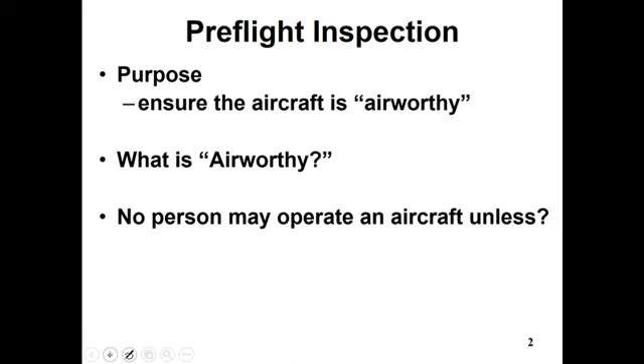So no person can operate an aircraft unless it's airworthy. And then, of course, here's one of the FAA's catch-all regulations: the pilot in command, the PIC, is responsible for determining if the aircraft is in condition for safe flight. So effectively, that means it is the responsibility of the PIC to do a pre-flight inspection and make sure that it is safe for flight.

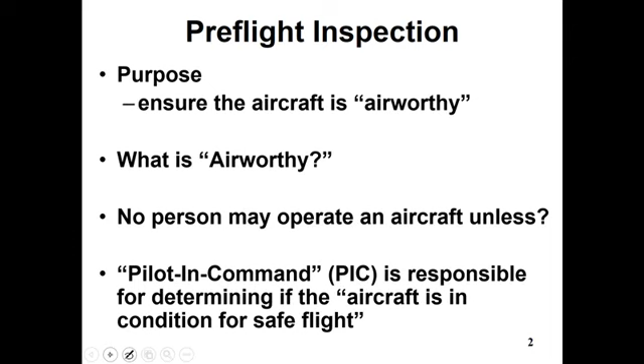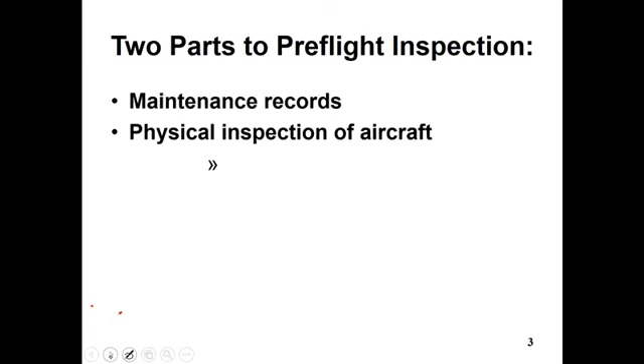So there's two parts to this pre-flight inspection. One is maintenance records, making sure that all the right maintenance has been done. And number two, visually taking a look and inspecting the aircraft before you get in it and go flying.

So the first thing we're going to do is go over what type of maintenance records you might have to pay attention to before you go flying.

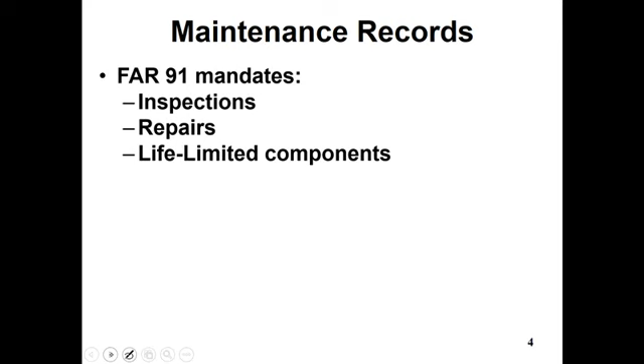Federal Aviation Regulation Part 91 mandates that certain inspections get done. If things are broken, you have to do repairs. FAR Part 91 also talks about life-limited components—we're going to get into that. Those are parts that, when they hit their life limit, you have to replace them.

We're also going to talk about airworthiness directives. Airworthiness directives are kind of like a car recall, where something's wrong with lots of different aircraft and everybody's got to get it fixed.

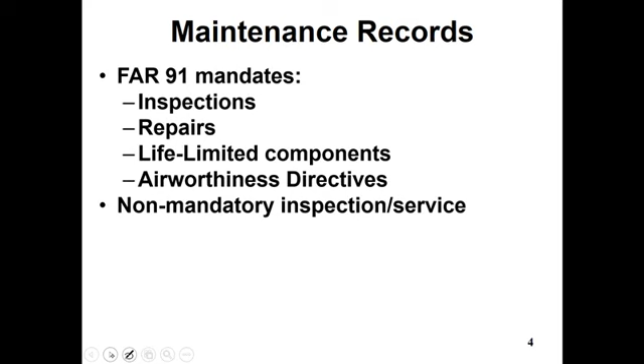There's also non-mandatory inspections and servicing of the aircraft that usually get done, but in some cases it's not mandatory, and it'll be a good idea to know which ones are mandatory and which ones are not.

And then anytime work gets done on an aircraft—any kind of maintenance at all, whether it's a pilot doing the work, a mechanic doing the work, or a repair station doing the work—FAR Part 43 says you have to record the maintenance that was done in the maintenance records. We commonly use the word maintenance logbook to refer to the records where everything is written down that gets done to the airplane.

Okay, first we're going to look at inspections. There are a lot of different inspections, and how often they have to get done, or how long they're valid, varies quite a bit. First of all, the annual inspection is valid for 12 calendar months—that's why it's called an annual inspection—and it has to be done by a mechanic who holds an airframe and powerplant rating, and they have to have an inspection authorization.

Inspection authorization: effectively you have to be a mechanic, and you don't have to write this down, but you've got to be a mechanic for 3 years, you've got to be active during the last 24 calendar months, and you've got to take some gnarly written tests to prove that you are a super awesome mechanic.

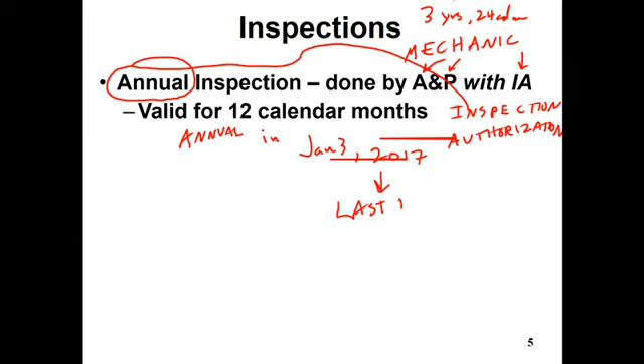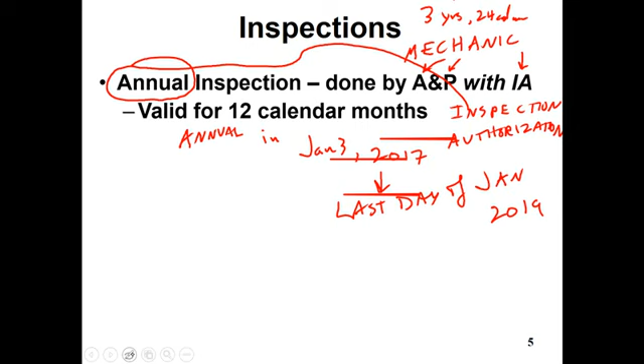12 calendar months effectively means that, say for instance, if you do an annual in January 3rd of 2017, it's good until the last day of January, 24 months later, which would be 2019. It's just like the calendar days—or calendar months—that we've talked about before.

Alright, so if I can just get this working the way I want, which seems to be very difficult for me today.

All small aircraft—when I say the word 'any,' I'm really talking about small aircraft. For small airplanes, helicopters, blimps, and gliders, the annual inspection system is just one of several ways you can keep the aircraft airworthy using inspections. That's the one we're going to talk about the most.

In a later chapter, we're going to talk about some other ways to maintain an airplane. But by far, the vast majority of small airplanes are in the annual inspection system.

Now, there are some times, in addition to the annual inspection, when an inspection has to be done every 100 hours. For instance, we'll get to that here in a second if I can get my pen going.

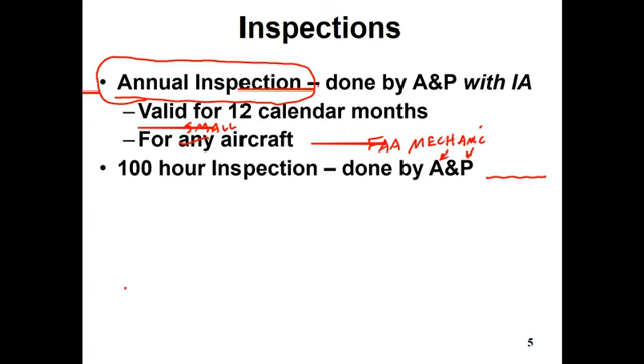A 100-hour inspection also has to be done by a mechanic, and this has to be an FAA certified mechanic, just like you're going to be an FAA certified pilot, who has an airframe and powerplant rating. But you'll notice they don't have to have the inspection authorization, so they can do this right out of school. As soon as they get out of school, they can do a 100-hour inspection.

What's rather interesting is that an annual inspection and a 100-hour inspection are the same inspection, considering what gets done to the aircraft, how it gets inspected, what gets inspected, how well it has to be inspected. It's all the same. What's different between the two is who gets to do it and...

When you need to do it. Why is that thing moving? And there we go.

The 100-hour inspection, done by a mechanic with an A&P rating, is valid for 100 hours of flying time, and then you have to get another one done. So that means it's going to end up getting done more often.

Let's say, for instance, you fly out of airport A and you're going to go to airport B, and the aircraft is usually stationed or based at airport A. You fly to airport B, and then you look at the maintenance records, and let's just say this is a 2.0 hour flight, and you're at point B, and you want to get back to airport A, where you're going to get your 100-hour done, and you realize that you're at 99.0 hours. If you make this 2-hour flight, you'll end up over here at 101 hours.

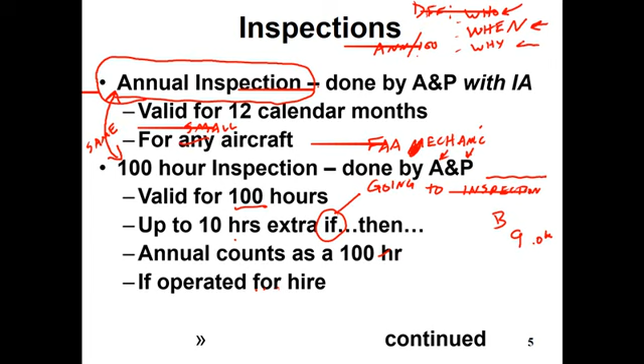Everybody has to have an annual inspection done, but you only have to have the 100-hour inspection done if the aircraft is operated for hire. So for instance, let's say you happen to own a PA-38 all by yourself, and you fly it around at the Fresno airport, and you had your annual inspection done in January of 2017. You can fly it around for 500 hours or however many hours you want, and you only have to come back and get the annual inspection done by the end of January of the next year, as long as it's not operated for hire. That is, you can't give rides in it for pay. You can share your expenses like being a private pilot. But if the aircraft is operated for hire, you have to have the 100-hour inspection done.

Now there is an interesting thing, for instance, like parachute jumping. The airplane is being operated for hire. People are paying money to get in it. You'd have to do an annual inspection on it, and then you'd have to do 100-hour inspections on it.

There is an interesting spot where you're doing flight instruction for hire. If the company that is renting you the airplane is also the company that you're paying for the flight instructor, then it's considered flight instruction for hire. If you own your own airplane, or somebody loans you an airplane, or you rent an airplane at a place to rent airplanes, but then you get your flight instructor separately, then that's not considered for hire, and you don't have to have a 100-hour inspection on it.

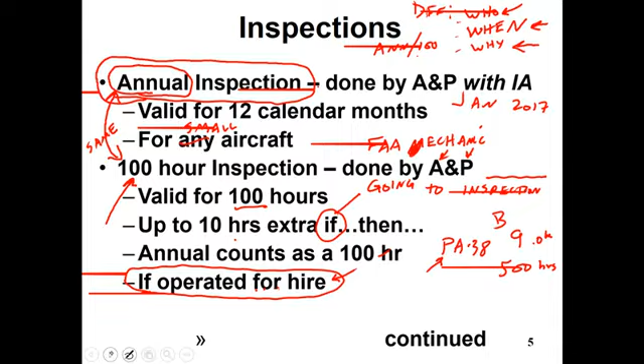The automatic altitude reporting system, another name for that, is the transponder mode C.

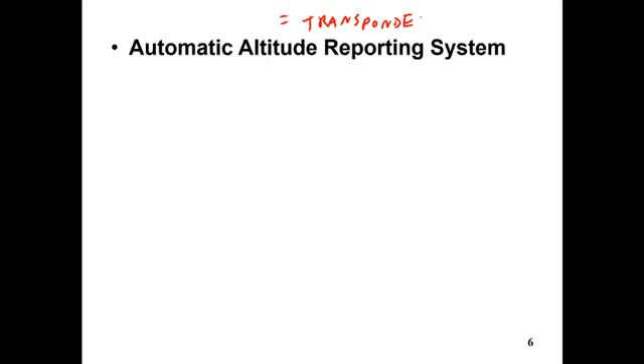The Mode C transponder, that's the part that transmits the pressure altitude inside of your static system. That has to be inspected, and that inspection is valid for 24 calendar months. I'm not going to go through the calendar month deal again.

But if it's not inspected within the last 24 calendar months, the inspection is not valid. Now you can't use it. You can't turn the transponder on to transmit Mode C, which means all the places you want to go flying that mandate Mode C, you can't go there.

So Class C airspace at Fresno Air Terminal, you got to have Mode C. So if you go out to fly an airplane out of the Fresno Yosemite Airport and the Mode C inspection, or the automatic altitude reporting system inspection, expired, you can't go.

There's also an altimeter and static system check, where it checks the accuracy of your altimeter, and checks the system of pipes or lines that go to the altimeter to make sure it gets the outside air to measure your altitude. That inspection also lasts for 24 calendar months.

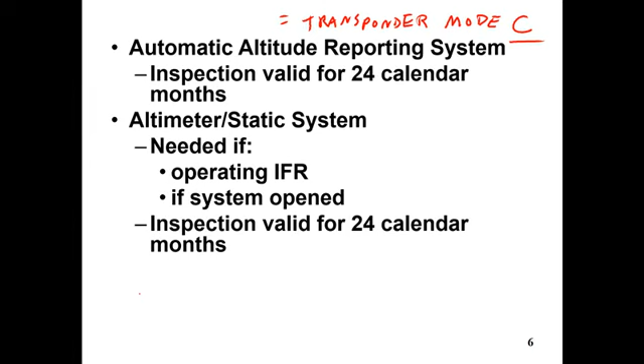You need it only if you're doing certain things. For instance, if you're flying IFR, Instrument Flight Rules, and of course we are going to be flying Visual Flight Rules with a private pilot certificate. Visual Flight Rules pretty much means good weather and away from clouds. So if we're just going to fly VFR, we don't need the altimeter static system test done.

But if at some point we're going to get our instrument rating and fly IFR, this is going to be a big project. We're going to have this done.

And if somebody does maintenance on the static system, then they have to do an altimeter static system check. But you're probably not going to know if they did maintenance on the aircraft, because there's no requirement for you to figure that out. And again, the altimeter static system inspection is good for 24 calendar months.

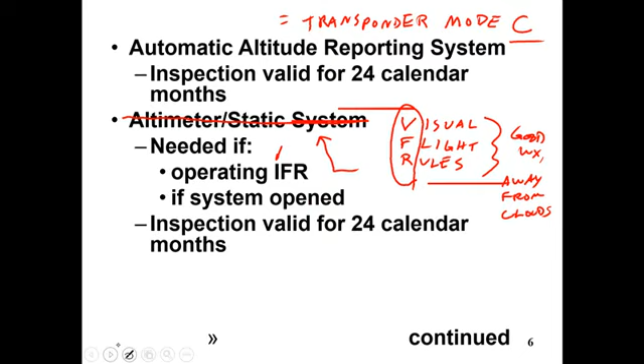The ELT is usually a little orange box in the back of the aircraft. You can't see it; it's usually behind the bulkhead. It's designed so that if you have a really hard landing, or you land off field and decelerate fast, the ELT has a motion sensor in it and it will start transmitting on some emergency frequencies, and someone will probably start coming to look for you.

That ELT has to be inspected, and its inspection is good for 12 calendar months. So when you're looking through the logbooks to see if all the inspections are done, you're going to be looking for the ELT, or emergency locator transmitter, inspection and see if it was done in the last 12 calendar months.

Also, ELTs have batteries, and although it's not really an inspection, it's a life limit. Batteries — it's in FAR Part 91, where it talks about having to replace the batteries if you've used the transmitter, all added together, up to 1 hour. So if for some reason it was getting tested, or it went off by accident, and it transmitted cumulatively — all added together equals 1 hour — then you got to replace the batteries.

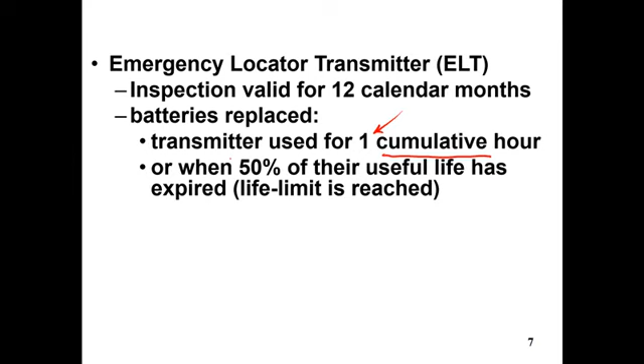Or you also have to replace the batteries whenever 50% of their useful life has expired, and that's the life limit of the battery. When you hit a life limit, you got to throw the part away or recycle it. You can't fix it, and that date of the life limit is going to be written in the logbook. So it'll say something like: ELT battery due replacement, January 31st, 2020.

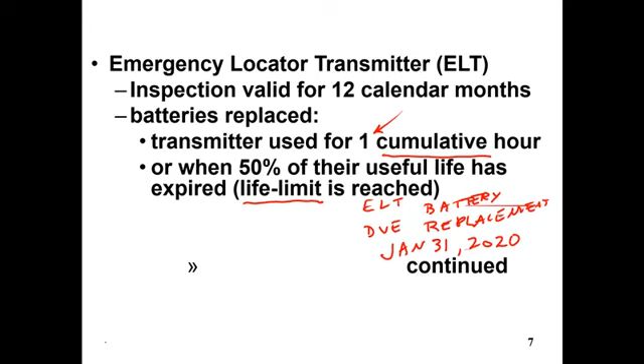Hey, talking about life-limited parts, let's talk some more about life-limited parts. Life-limited parts means that when a part reaches its life limit, you have to throw it away. It has to be discarded. You can melt it, recycle it, throw it in the trash, but you cannot inspect it and put it back on the aircraft. You cannot repair it and put it on the aircraft. There is nothing you can do to that part that makes it airworthy again. It's no longer airworthy when it hits its life limit.

A part that you use on condition means that it never has a specific moment when, aha, it looks good, but I have to throw it away anyway. That's really what life limit is. You're actually going to take the part off the aircraft while it's still working and still looks good, but you're not going to use it anymore, because at some point it might break, so you're going to replace it before it can break.

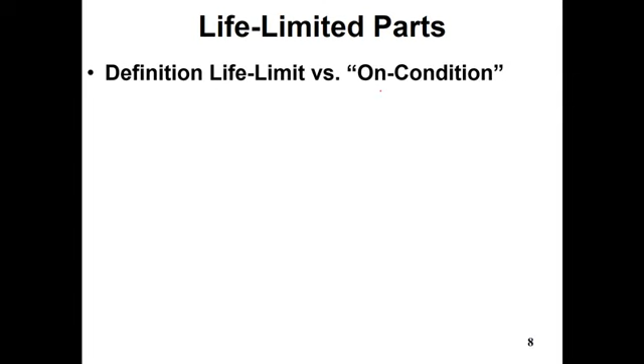On condition parts means that it's never expected to break and that you never have to replace it just because of so many flying hours. It just has to get inspected during the annual inspection or the 100-hour inspection.

So let's take a look at some PA-38 Piper Tomahawk life-limited parts. Of course, Tomahawks have ELT batteries. Usually those batteries, when installed, have a life limit of about 2 years, but it varies based on what battery.

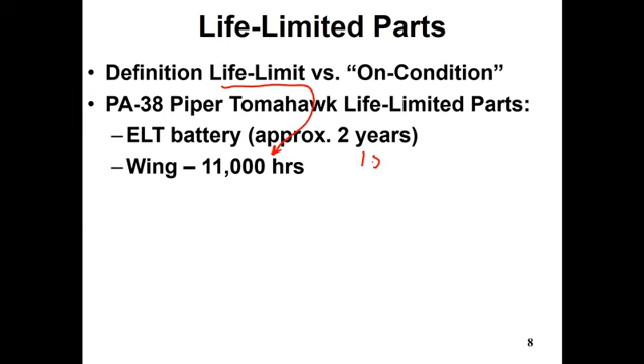The wing on a Tomahawk is designed so that at 11,000 hours, you have to take the wing off and put on a new wing. What that effectively means is the life limit here is 11,000 hours. That probably means it could go to 15,000 hours before it breaks, so subtract 11,000 hours, you've got 4,000 hours of a safety margin there. That's usually the way life-limited parts work, you replace parts before they go bad.

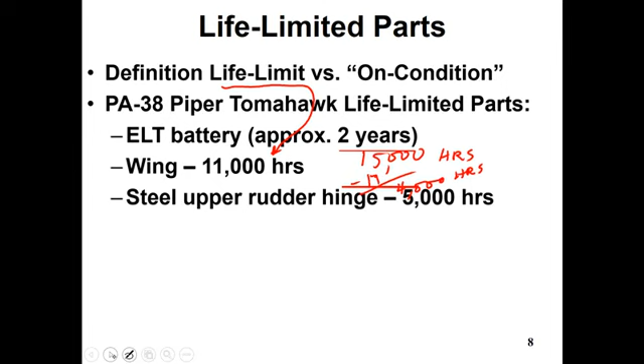There's a steel upper rudder hinge that has to be replaced every 5,000 hours. There's a lower longitudinal trim spring, or trim springs, that have to be replaced every 1,500 hours. The fin spar attachment plate, depending on which ones you've got, have to be replaced anywhere from 3,000 to 5,000 hours. These are probably, at least all the ones I could find, of the life-limited components in a Piper Tomahawk.

This ELT battery is going to be on pretty much every airplane out there. There's a lot of small airplanes that don't have these kinds of parts, so the only life-limited part on it might be an ELT. But when you start talking bigger airplanes, and certainly when you start talking helicopters, you end up with lots of life-limited parts installed on the aircraft.

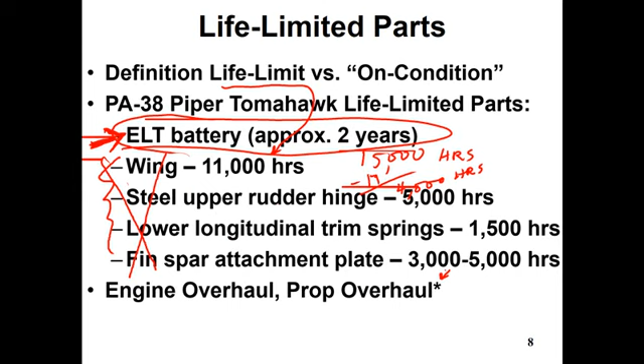Now I want to talk about engine overhaul and propeller overhaul. I put an asterisk to remind me that under a lot of conditions flying little airplanes, although the manufacturer may recommend overhauling the engine and the propeller, generally speaking the manufacturer's recommended time between overhaul is only required if the aircraft is operated as an air taxi under Part 135 or in scheduled airline service under Part 121. So we're going to be flying airplanes under Part 91, and even if the manufacturer recommends it, we don't have to do it.

Now a lot of people go ahead and do it because most of the time it's a good idea, but engine overhaul, prop overhaul, and a lot of other overhauls like a magneto overhaul are not required under Part 91, even though the manufacturer recommends it.

Same thing with an oil change and an oil filter change. Although it's a really good idea, your engine's going to be a lot happier and last a lot longer, you don't have to change the oil and the filter. If the engine has a filter on it, generally speaking the manufacturer recommends changing the oil every 50 hours. But I've got to draw a line in here - these are definitely not life-limited components, but they are things that tend to get done on a certain time basis.

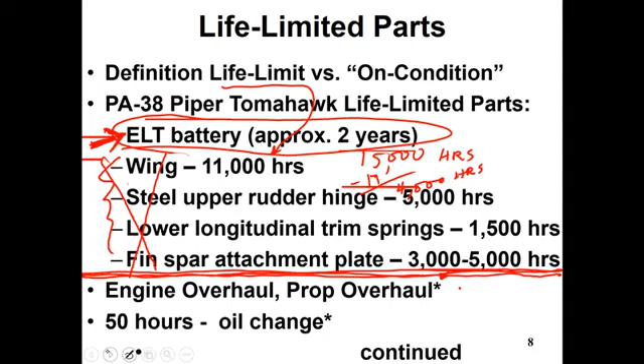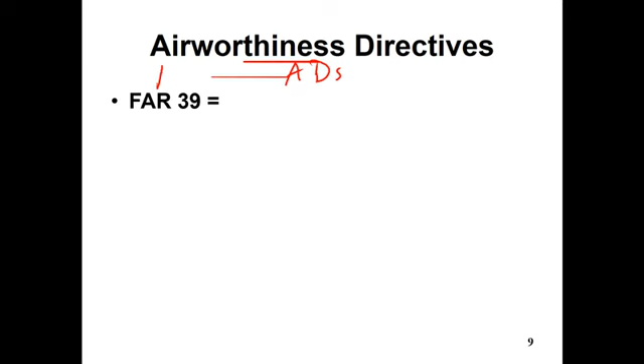Okay, last thing we're going to talk about before the visual inspection are airworthiness directives. Another term for airworthiness directives is ADs, very commonly abbreviated that way. ADs are covered in Federal Aviation Regulation Part 39, which is a federal law, which means they are mandatory.

Now, if you've ever heard of a recall on a car, that's where a car manufacturer figures out they made a car with a defect found in lots and lots of cars. So they try to notify all the owners to bring it into a dealership and maybe get it fixed for free. It's a good idea because it's usually a safety issue. If you want to drive your car around and don't take it to the dealership to get it fixed, that's not breaking the law.

But if an airworthiness directive is issued about an airplane, an engine, a propeller, or something installed like a radio, a tire, a battery, or an ELT transmitter, then it's mandatory - you have to fix it. And why are you fixing it? It's because the FAA determines, and this is key here, the FAA says it's a safety issue and you have to do something about it.

Now, the manufacturer may go to the FAA and say, look, we found this defect, we want you to issue an airworthiness directive and make everybody fix it. But they're going to have to show the FAA that it's a real problem.

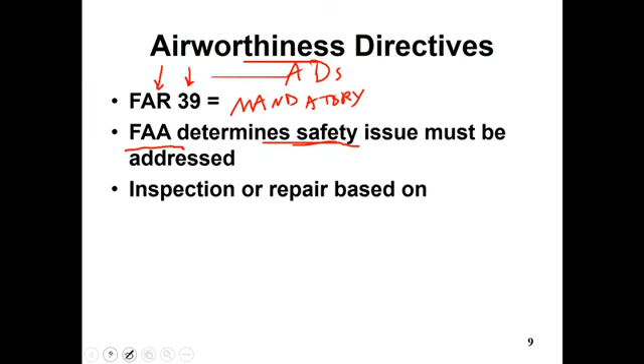And it could be the other way around. The manufacturer might say, no, it's not that big of a deal, and the FAA decides it is. If the FAA decides it is, they will issue an airworthiness directive under Part 39, and then everybody has to do it.

And the fix, the thing you have to do on the airworthiness directive, it'll either say you have to inspect it, and then maybe if you inspect it and nothing's wrong, you let it go fly again, and maybe you bring it back in 100 hours, or you bring it back next year. Or it may say you have to make a repair, or the third thing, it might say you have to replace the part.

You might have to replace the part because the part's no good. So the airworthiness directive itself will say whether you can inspect it, whether you can repair the part, or whether it has to be replaced.

And they're going to tell you how long you have to go before you have to inspect it. That is, how much time in service in hours, how many hours is on that part. Or they might say number of cycles. Cycles could be engine starts. Cycles could be the landing gear being retracted or extended. Cycles could be the flaps being extended and retracted as one cycle.

It could also be calendar days, like once every 12 calendar months, once every 60 calendar months, or once every day. I actually saw an AD come out where on a helicopter you had to visually inspect the rotor blades every single day, and it was in an airworthiness directive.

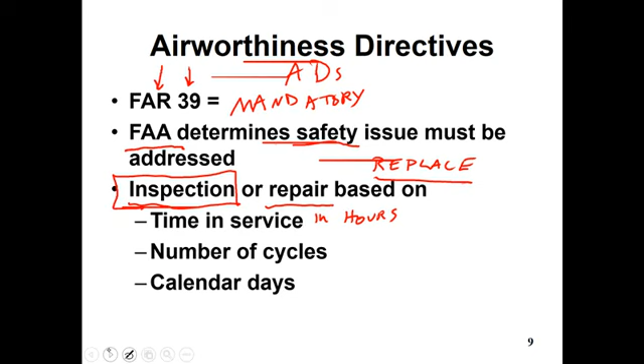If you have a GPS, global positioning system, in your aircraft, and there are some other kinds of radios that also have a database, and that database has latitude and longitudes, it has locations of airports and navigation transmitters and a whole bunch of other stuff. If you want to use it for your primary navigation, you have to have a current updated database.

You can go flying if you use it instead of your primary. If you use it as your secondary source of navigation, then it's okay. So if you're looking out the window and using your compass, your watch, your E6B, and using pilotage and/or dead reckoning to navigate as your primary source of navigation, then it's okay to use a GPS with an expired database as your secondary source.

But you might want to decide to check a few things in the database before you go flying.

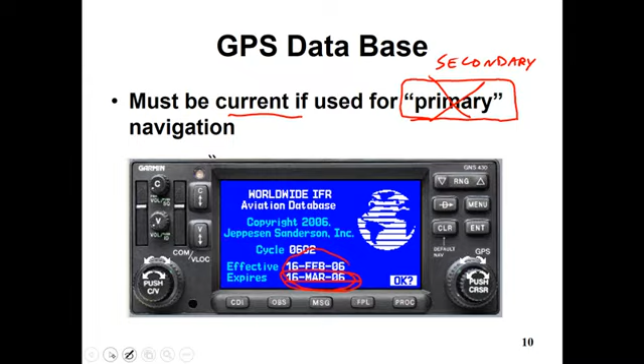Okay, now we're going to get to the physical inspection of the aircraft, and I don't even know what that thing over there is. So let's see. Oh, yay, it went away. So the physical inspection of the aircraft.

First thing we're going to look at is aircraft documents. They have to be on board the aircraft, and there's a nice acronym called ARROW to help us remember what all those things are. An airworthiness certificate is a document issued by the FAA saying this airplane, when it came out of the factory, was airworthy.

This is not the same as registration. Oh wait, there is registration. On board the aircraft has to be a piece of paper, kind of on cardstock, which is the registration from the FAA, and it expires every 2 or 3 years. Some states have state registration, which works out great because the word ARROW has 2 R's in it.

Some states do and some states don't. If you go flying in a state that has mandated state registration, the FAA can't prosecute you because they can only mess with you because of federal issues.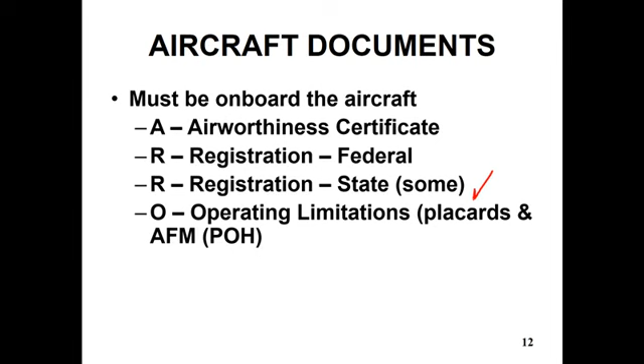O is for operating limitations. Operating limitations, you have to have placards. Placards is just another word for signs or directions or labels that are on the aircraft.

And then you have to have the approved flight manual. If the small airplane was built after 1979, it has an FAA approved flight manual. AFM stands for Approved Flight Manual. There it is, AFM. Sometimes, and a lot of times actually, we call it the Pilot Operating Handbook.

But there's going to be one in the airplane. It's going to be the one for that airplane, and it's going to have the serial number of that particular aircraft in it. Now, we're going to have our own copy, but that doesn't apply to any particular airplane. That just applies to all of them.

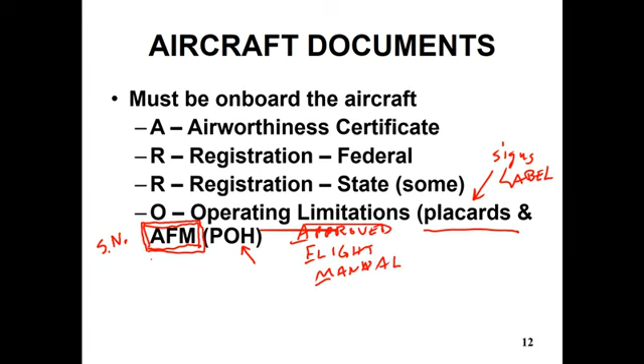So if there's a small airplane built after 1979, we're going to be looking for those placards, and we're going to be looking for the FAA-approved flight manual in the airplane that is for that particular aircraft.

W stands for weight and balance specific to that aircraft. There's going to be a piece of paper, usually folded up and stuffed somewhere into the approved flight manual.

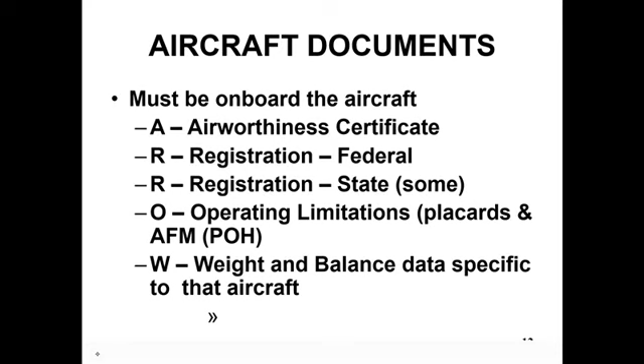It's going to say things like exactly how much that particular airplane weighs. Later this semester we'll talk a lot about weight and balance, figuring out if the airplane weighs a certain amount, how much more stuff can we put on it before we take off. So that is ARROW, or ARROW - that's a famous acronym in aviation.

Okay, so let's talk about actually visually inspecting, looking at the aircraft. A question that comes up a lot is, do we have to do a full and complete pre-flight inspection every flight? The answer is maybe. If you are new to the airplane and somebody else has done the flying and the pre-flight inspection wrong and missed something, you are still responsible.

Remember, the PIC is still responsible for determining that the aircraft is in safe condition for flight. So effectively, if this is the first time you've flown it that day, you need to go do a visual inspection. But let's say we fly from one airport to another, three hours away. We get out, get gas and lunch, and then go back out to the airplane. Do we have to do the entire pre-flight check again?

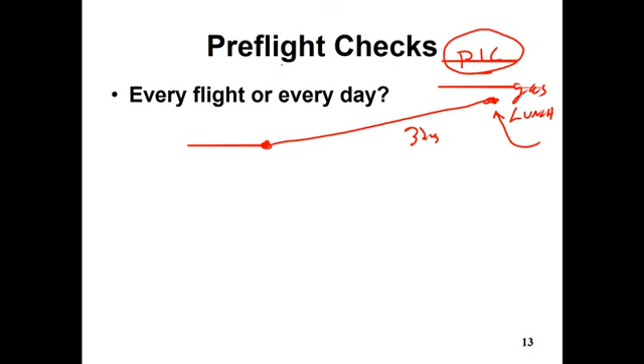The answer is, it's up to you as the pilot in command. Generally speaking, if no one else has flown the airplane and you're 100% confident of that, you go out and check the fuel, check the oil, look at the wheels, walk around the airplane once to make sure nobody's come up and damaged it. Generally speaking, if nobody has done anything to the airplane, the pre-flight check lasts all day, as long as you're the one who did it and you're confident nobody's touched the airplane.

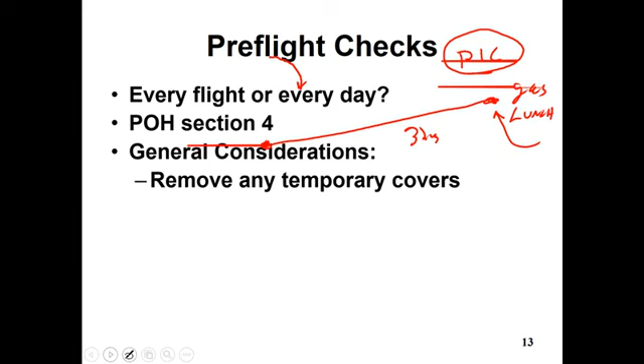The pre-flight check is in the Pilot Operating Handbook, Section 4. Here are some general considerations for your pre-flight inspection. You'd want to remove any temporary covers that were covering the engine, windshield, or any openings on the airplane, like the pitot-static system, so air can get in and the airspeed indicator and altimeter can work. You would remove any wheel chocks.

You would remove the chains, the tie-downs holding the airplane down, and even small accumulations of frost, ice, or snow. There's actually an FAR that says you can't have any of this - you can't have snow, ice, or frost on the aircraft before takeoff. It has to be removed. And you're looking at the general condition of the airplane - has anybody run into it with a truck?

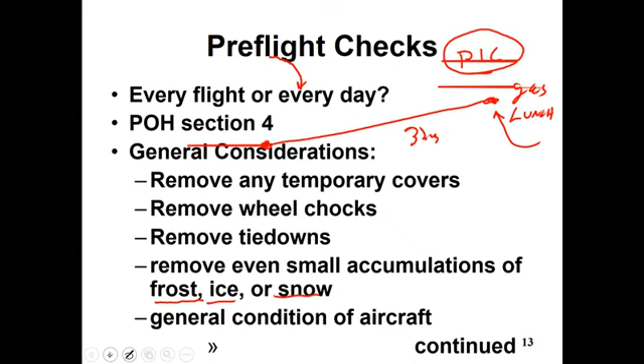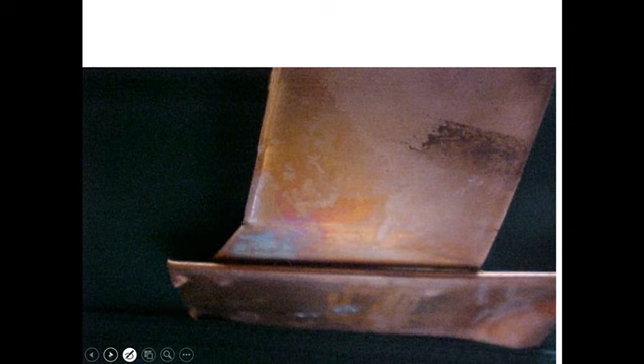You're going to do that every time you go flying, and there's a nice checklist to follow. You're going to verify you can look on the ground for oil leaks or fuel leaks. If you see anything discolored due to heat, you might want to do something about it - except exhaust pipes, they're always discolored due to heat. Here's another pipe that looks a little on the discolored side.

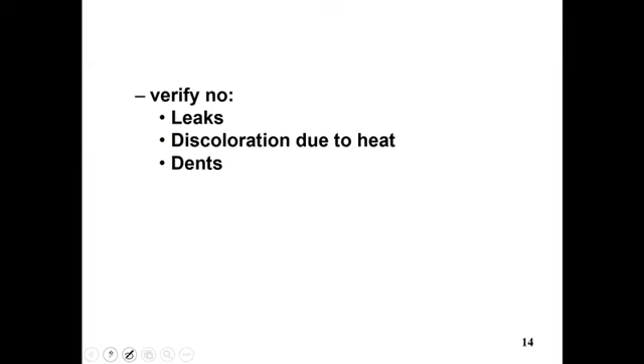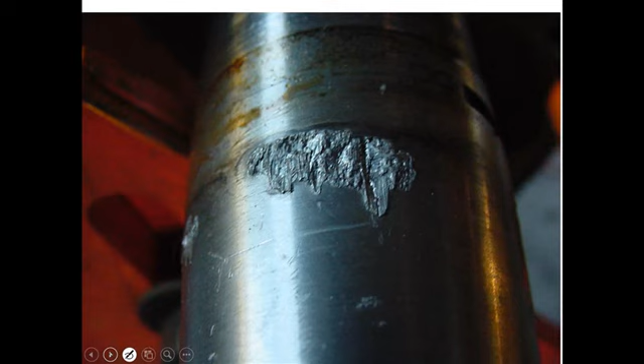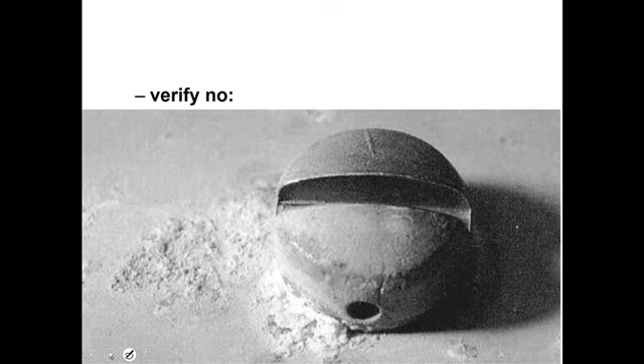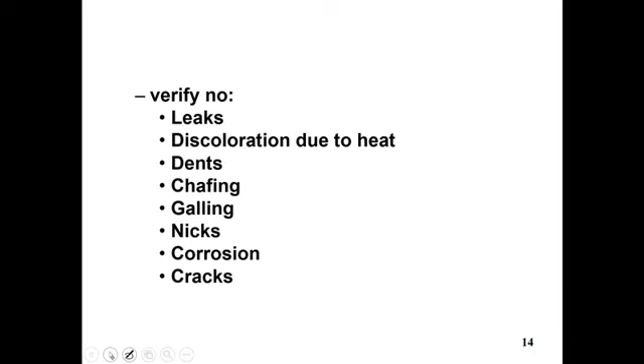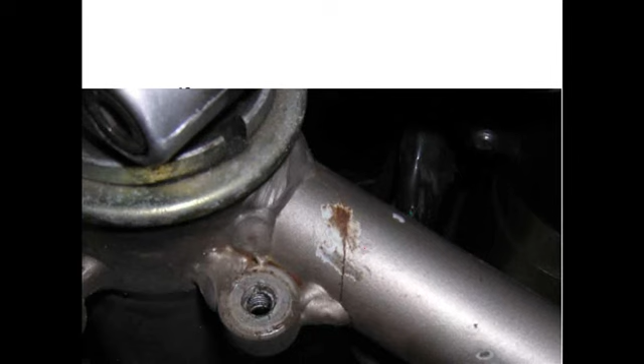And then, of course, cracks. Here's a great crack in a piece of aluminum - it's a big enough crack you could fit a screwdriver under it. So you're going to be looking for all of these kinds of things. Here's a nice crack - you can see this crack right here on this piece of steel tubing in the engine compartment.

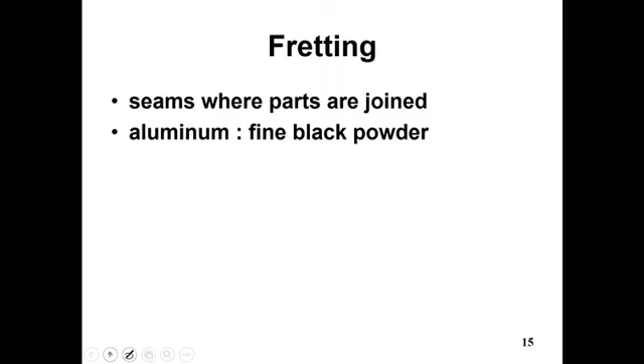So fretting is where seams are joined, and aluminum, when it rusts, can rust under certain conditions where it's a fine black powder. Here the airstream is blowing past it. This is probably on an engine compartment, and this is called fretting.

Okay, so you're going to have a checklist, and you're going to follow the checklist when you're doing a pre-flight. The question is, why use a checklist? The number one reason is so you don't forget anything. As a pilot, you're going to use a checklist over and over on all kinds of tasks. It's not that you have to follow the checklist step by step. You can do a few items and then go back and see if you got them all. That's an acceptable way to do it. But in the end, you still have to make sure you did everything on the checklist.

You have to bring all your pilot certificates. If you're a pilot with a flight instructor certificate, you got to bring your pilot certificate and your flight instructor certificate. Now, if you aren't a certified pilot yet, you're going to be applying for a student pilot certificate, and when you solo, you'll have to have that student pilot certificate with you. You also need a valid government-issued photo ID. So a state driver's license is just fine.

You need to have a medical certificate. Again, you don't have to have the medical certificate until you solo, and you have to have it with you whenever you solo, and whenever you're exercising the privileges of a private pilot or higher. And if you have medical restrictions, like on my medical, it says I have to wear eyeglasses, whatever it says on your medical, you have to comply with that restriction.

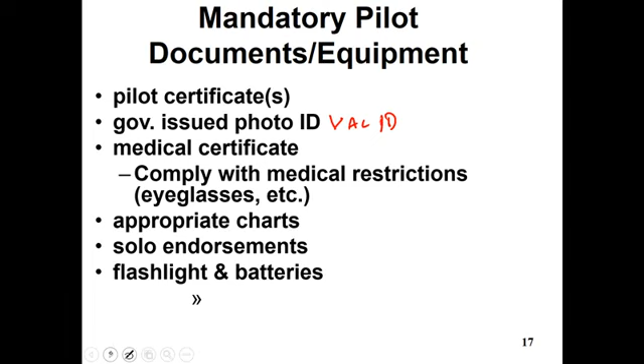Okay, weight and balance. Covered it just a little bit earlier—I guess I didn't cover it. In any case, weight and balance is talking about the airplane and how much it weighs.

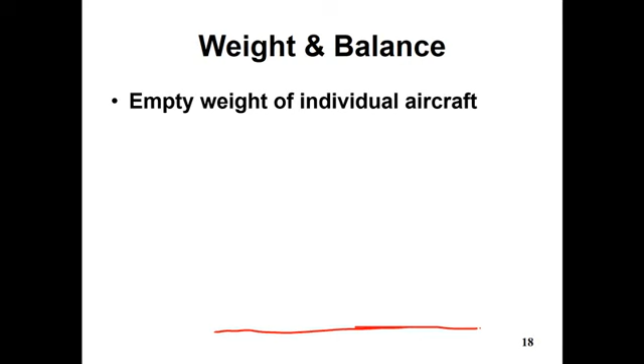Here is our Piper Tomahawk with those funny lines. People sit in here, they fly the airplane, and their hair sticks up. Okay, and this tail actually goes up, and there's a T-tail on top.

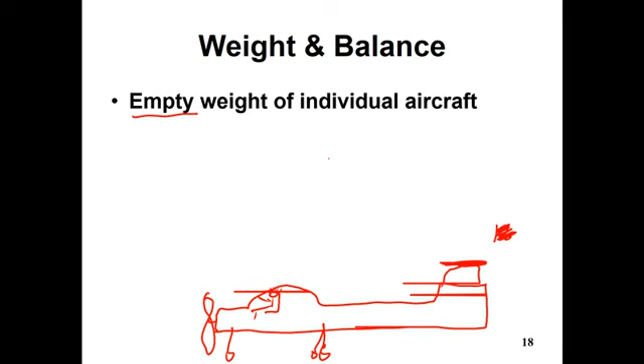So how much does the airplane weigh? The airplane can weigh a maximum amount, but when it's empty, that number is inside. Remember that weight and balance paperwork is inside the airplane, so you as a pilot can look it up. So if you take that and add in how much fuel you put on the airplane, then you add in the pilot and all the passengers and their body weight, including their clothes, and you add in how much cargo you're putting in the cargo compartment, which in a Piper PA-28 or 38 is not a whole lot.

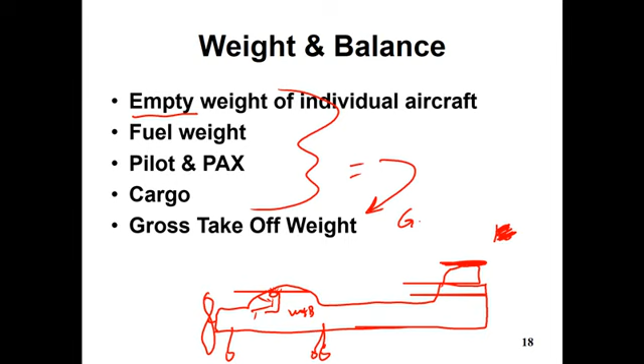You add them all up, and all of these things together equal the gross takeoff weight. And this is going to be important because the heavier the airplane, the longer the runway it's going to need to have.

The heavier the airplane, the slower it's going to climb. At some point, we're going to reach the maximum certificated gross takeoff weight, and the FAA says you cannot take off an aircraft above its maximum certificated gross takeoff weight.

We're also going to talk about center of gravity limits before takeoff. So I forgot to draw the wings in here, so there's the wings. Let's say the center of gravity is pretty close to where the pilots are and the fuel tanks are in there.

So here's the center of gravity, the CG. Now if you put a bunch of weight in the back, the center of gravity moves aft, and that's why you're going to have to use trim, but at some point you run out of trim. The center of gravity can go back a little bit, the center of gravity can go forward a little bit, but there's going to be some limit that the FAA says the center of gravity can't be farther back than this, and can't be farther forward, otherwise you won't be able to control the airplane.

So there are limits to the center of gravity, and you're going to be checking that before you take off. The good news is in a PA-38 it doesn't change very much because people are sitting on the center of gravity, so it doesn't move very much. Once you've figured it out, then you don't have to literally get out a calculator every single time.

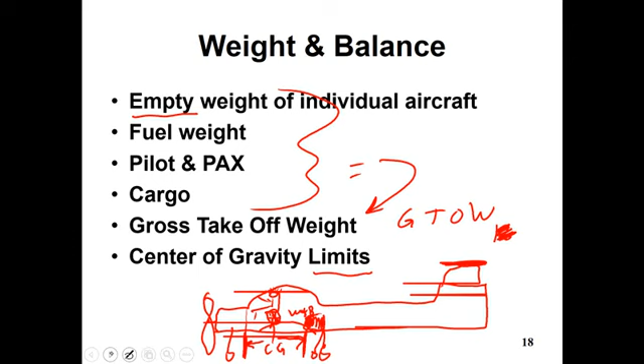Okay, aircraft performance. Already talked about gross takeoff weight. That's how much the airplane weighs - the empty weight of the airplane, all the fuel, all the passengers and the pilot, all the cargo. All of that added together is the gross takeoff weight.

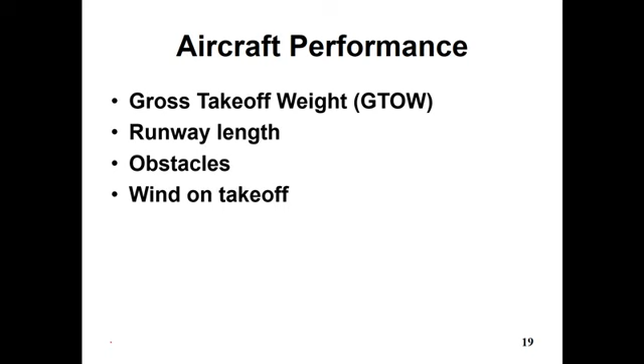And the higher the gross takeoff weight, the longer the runway you're going to need. If there are obstacles out there, you might have to look at how much of a runway do I need to be able to take off and climb and get over the obstacles. Is the wind blowing down the runway at 5 knots, or is it blowing down the runway at 20 knots?

If here's the runway, and here's my airplane, there's the wing, and I have 5 knots of wind, I can be doing 60 knots indicated airspeed, but I'm really going across the ground at 55 knots. So I don't have to get as fast before I can take off.

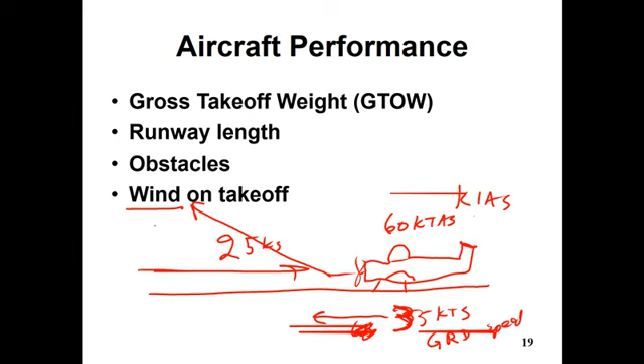What if the wind was going 25 knots? 60 minus 25 is 35 knots. I'd only have to get up to 35 knots ground speed, and I'd be able to get off the ground and start climbing. So the bigger the headwind, the less of a runway I need. You're going to take into account the wind when you're figuring out how long of a runway you need.

And you're also going to be figuring out density altitude. I'm not going to go into density altitude too much, but essentially it means that as you go up in altitude, the air gets thinner. Then less air can get sucked into the engine, and your engine doesn't perform as well. It also has an impact on how well your wings generate lift. So in general, the higher you go or the hotter it is, the less the aircraft performs, and you're going to have to take that into account.

You're also going to take into account humidity. There's no calculation, you're just going to use a rule of thumb. But at sea level, on a 100-degree Fahrenheit day, which is about 38 degrees Celsius, if it gets to 100% humidity and it's raining, you can actually lose 9% of engine power due to humidity displacing the oxygen, and the engine can't burn the water vapor. So if you've displaced enough oxygen, the engine doesn't produce as much power.

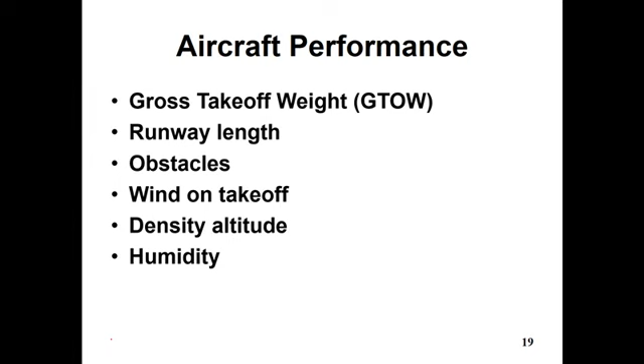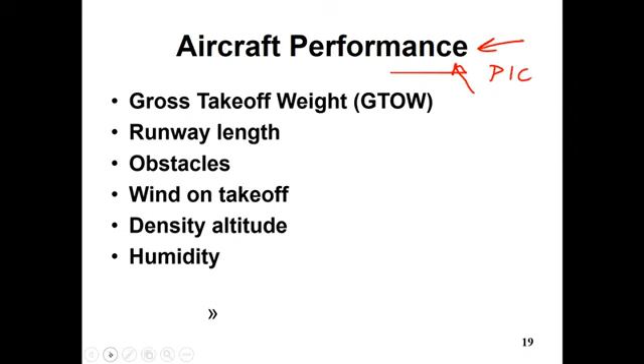And we're going to talk about performance in a whole other section. I just wanted you to understand that you're going to be responsible as a pilot in command to be checking aircraft performance before takeoff, to make sure that you've got enough runway and the airplane's going to climb. Got any questions? Let me know.